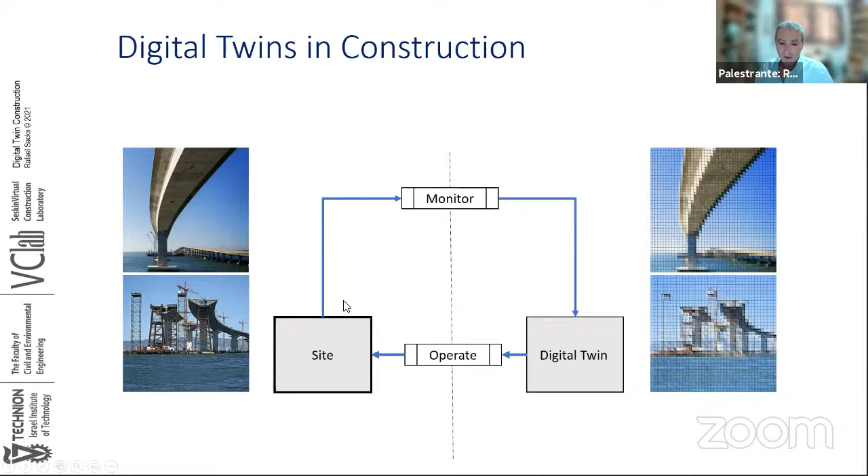This comes from the fundamental ideas of digital twin from manufacturing and transportation. You might imagine an airplane's jet engine flying through the skies, and in the control room of Rolls-Royce somewhere a digital twin of that engine, monitoring oil pressure, speed, rotation, temperatures, and a whole range of data. If they need to make corrections to how it's running, the digital twin can make those corrections using telemetry directly into the engine while it's flying. So that's the concept behind this.

When we talk about the kinds of monitoring we can use in construction, they include a range of things, from basic Internet of Things sensors like temperature, humidity, density, quantities, through laser scanning to build digital point clouds, photogrammetry using 360-degree cameras or other images, through barcodes read by barcode readers on site, radio frequency IDs or Bluetooth tags sensed by smartphones or other equipment. Many trucks and tower cranes and other equipment have a 'black box' that monitors the equipment as it's operating, and some companies already have the telemetry needed to get that information into the cloud and into the digital twin for the project.

We can also have people on the site using their smartphones to report things and confirm something is done or not done, or there's a problem, or take photographs. Many construction companies operate enterprise resource planning software, like SAP or others, so purchases of materials, payments of salaries, accounting, timesheets for workers, and all these kinds of things are available digitally. And not to forget, we also have audio recordings we can use.

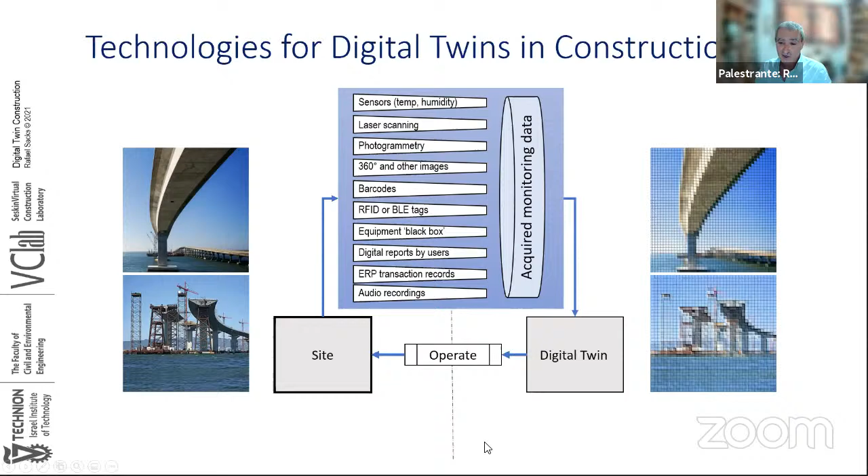Then we acquire all this monitoring data. Although I show this as a single arrow, we need to interpret it all to build up this digital twin, and that's not trivial - it's really complicated. The complication arises because the amount of data collected is very, very large, and we can't use that raw data.

So what we really want to achieve is this thing called a project status model. A project status model is a bit like a BIM here, but a building information model tells us what is the future of a building. A project status model tells us what's the present and the past of a building. So to go from this raw data through to the project status model, we have to do a lot of work interpreting and merging the information.

This is largely done with artificial intelligence, and that may be with rule-based systems or with image processing, computer vision, and other things. So we're trying to go here from data to information.

The reason we want to use the BIM as a supplement for information here is that it's often much easier to interpret something I can sense when I know what to expect. So if I have a point cloud with points that fall on a particular wall, it's helpful to know what the intent was in terms of having a wall in that place. Then when I find points on that wall, I can make logical conclusions about what those data points in the point cloud represent.

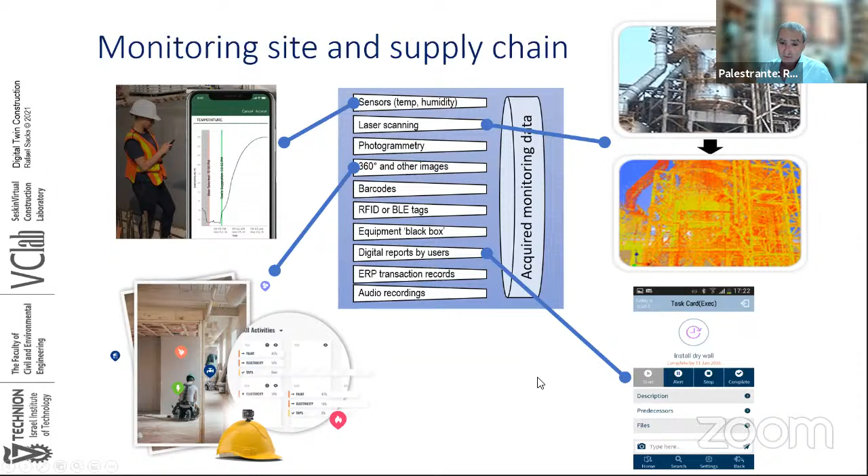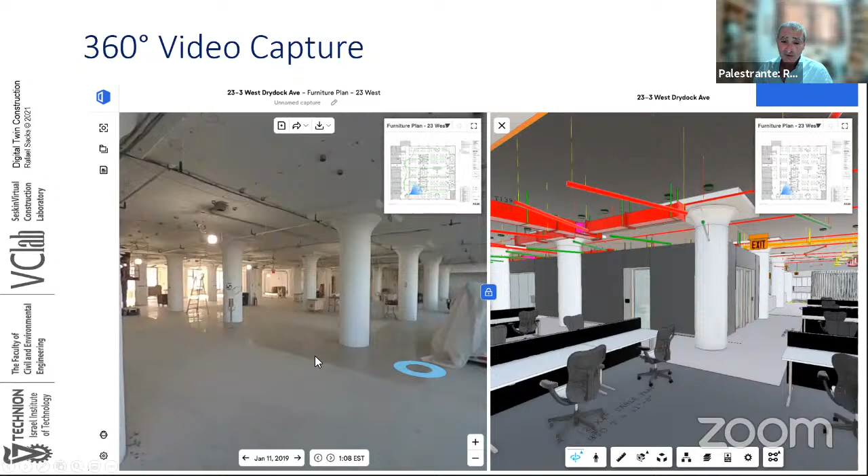On the left, you can scroll backwards and forwards in time because those videos are taken from a 360 camera every day, so you can go forwards and backwards through the site. You can also run comparisons.

Buildots is a company now active in many places in the world. They've raised, I think, a total of $46 million for development, and they're continuing to expand.

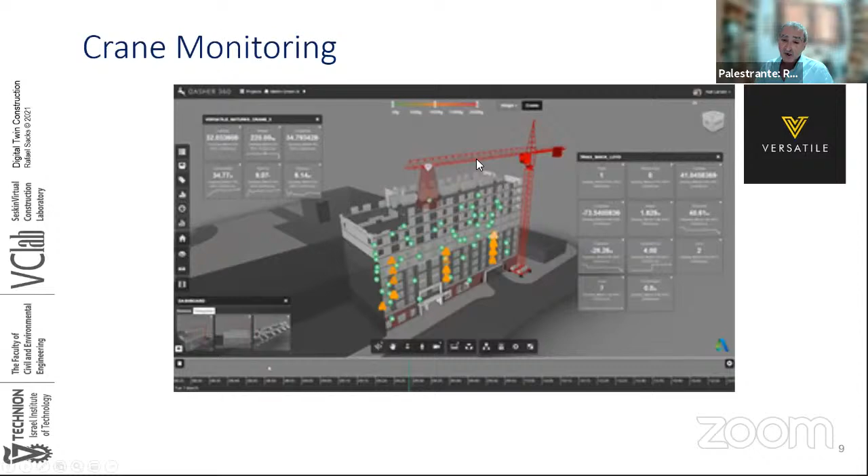There are other examples, companies who specialize in monitoring tower cranes. This image is from a company called Versatile. Versatile likewise began as a startup and is now active in many parts of the world monitoring tower cranes, but actually they're using it to monitor the state of the project.

And it also works in the other direction. Both of those technologies work from the field to the model, or to the digital. But here's an innovation that works from the digital to the field. What we're seeing here is a company called Lightyx.

They have a machine that can project the plans or models onto floor surfaces in the real world. So you take your BIM model, load it up on a machine, and project it directly onto the surfaces, whether it's on a floor, a wall, a ceiling, a roof, or wherever. So we also have technologies for going from the models to the field directly for production work.

Now, all of those are, I chose 3 Israeli startups which have their roots in the Technion, in graduates from the Technion.

But of course the big challenge is this, and I'm going to go back for a moment to here. Each of those applications you already see being developed fit into just one of these sources at the bottom. None of them do this interpret-and-merge step, where they take information from multiple sources and create real project status information.

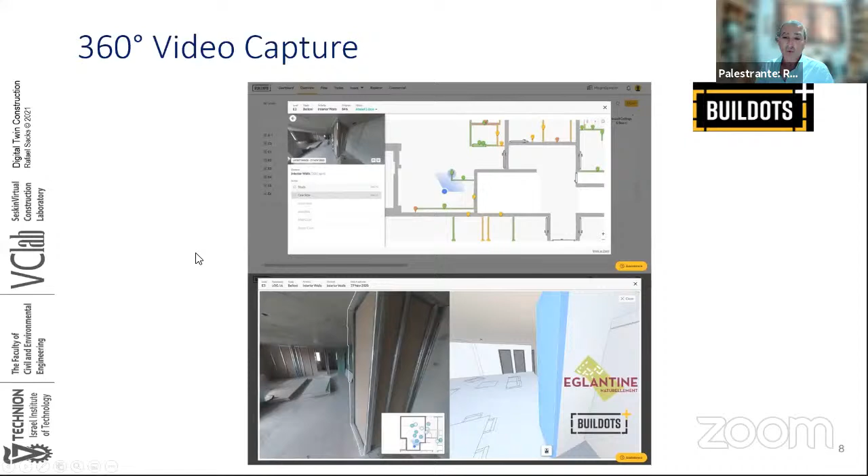To be able to say, okay, what should I do about it? What's the next step? Making intelligent control decisions about what to do, it's not enough to know data or information. You have to have knowledge, and that knowledge has to have the context where you merge all of that information.

And we have a separate research project dealing with that. It deals with complex event processing, and I'm not going to get into that now. But what I do want to do is say this.

When we think of the digital twin, what we really want to do, because we have a closed cycle of monitoring and operating, is use the real-time information streams to enable a closed-loop model of construction control. The best model we have for that is from lean construction, the idea of plan, do, check, and act.

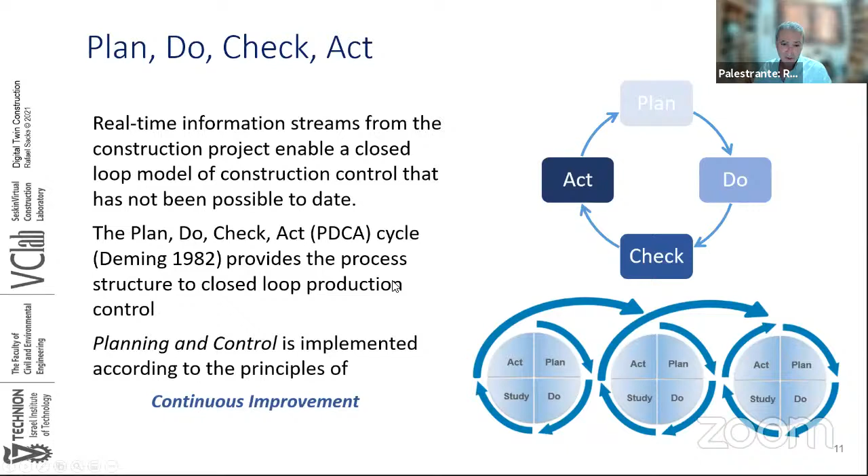And of course we do this consequently. So in every planning and operation cycle, we plan, we do something, we study it, we check it, and then we take some action to change the way we're working, and then we repeat that repeatedly until the project is finished.

So if I think of this cycle of plan, do, check, act in the context of the digital twin, the first thing we're doing is digital modeling of a built facility. So we build a BIM model, and the BIM model is not only the product, but also the process. We're talking about not just what we build, but how we intend to build it, when we intend to build it, and who will build it. And then we build: we fabricate things off-site, we construct things on-site, and we operate the building site.

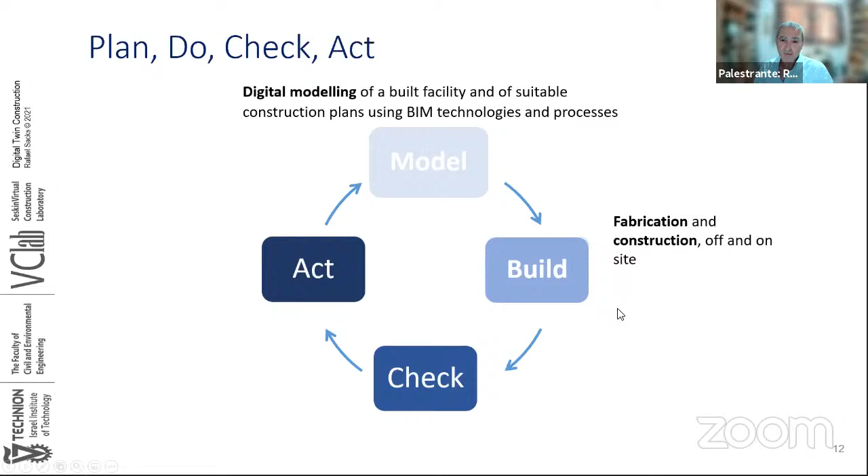And then, as I said, we monitor and interpret. This is the digital monitoring of the facility. We interpret that information using some intelligent software to generate what we call the process and product status. And then we want to evaluate and improve.

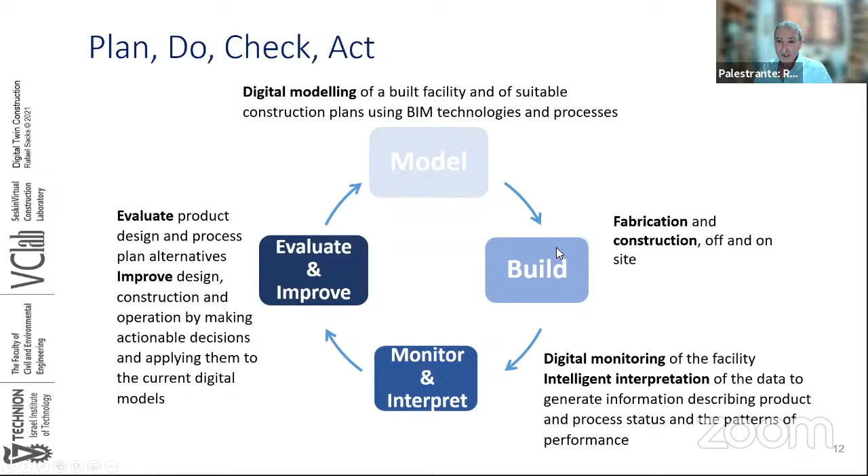That's the act part. We want to evaluate what we've done. We also want to evaluate alternatives for going forward. I have a construction plan up to now, I have a schedule, but if I continue that schedule, what will happen? And if I change the schedule, if I change the construction plan or the methods, what will be the outcomes? And if I can do all that, and I come up with some better plan, an improved product design, then I need to go back to my model, change it in the BIM model, change it in the construction plans, and then use those to build in my next week or month cycle.

So on the basis of that idea, we have a process map where we try to lay out the different components and aspects of what we call the digital twin design and construction process. You can think of it like this: it begins, of course, with the plan, do, check, act, and it's a series of these cycles.

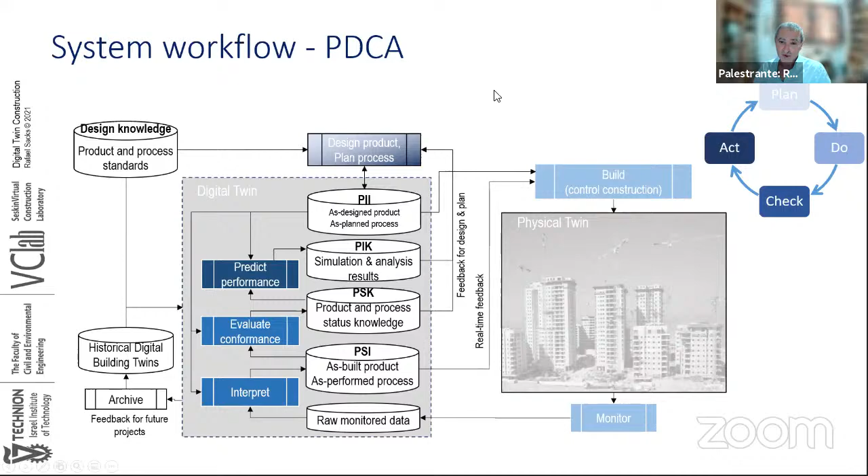So our process begins with designing. I design some product and plan a process. When I design the product, what I generate from that is our project intent information. We have here PII, the project intent information. This is what I intend to do. It incorporates the BIM model - this really is the BIM model. On the basis of the BIM model, which is the as-designed product and as-planned process, I then go and build.

I build the building, I operate the construction. That generates a physical twin - I'm generating real buildings. And then I monitor them, using all of those technologies I mentioned before. And they generate for me raw monitored data.

Now here, I want to call all this digital side the digital twin, but you can see right away that if this here is the BIM model, the PII, that's quite different from all the rest of this stuff. So what is the rest of it? It's raw monitored data, which I then interpret, and I have what I call my project status information, PSI. This is past - it includes the as-built product and the as-performed process. It's maintained in a separate database, separately from the BIM model and the plans, which are future-looking.

I then can evaluate conformance. Well, what does evaluate conformance mean? I can compare what I intended to do with what I actually did. And the difference between them gives me knowledge about the product and the process. Am I on time? Am I behind schedule? Is the construction accurate enough? Are there quality faults? Are there safety problems? All of these conclusions that I obtain by comparing the PII to the PSI, I can call my knowledge about the current state - we call that the project status knowledge.

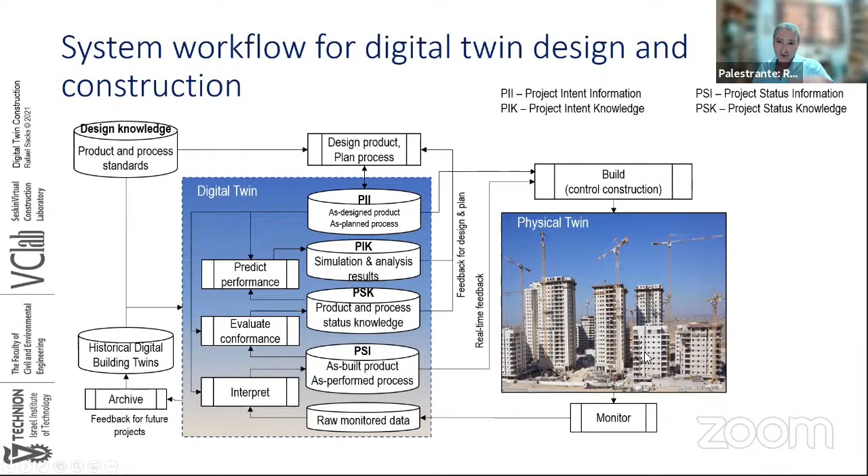If I focus for now on the predict performance part, then I'm comparing the project intent information and the project status and knowledge about what the situation is. I'm going to use those two things to try to predict what might happen in the future. And that will give me a basis of information for making decisions about what to change, if anything.

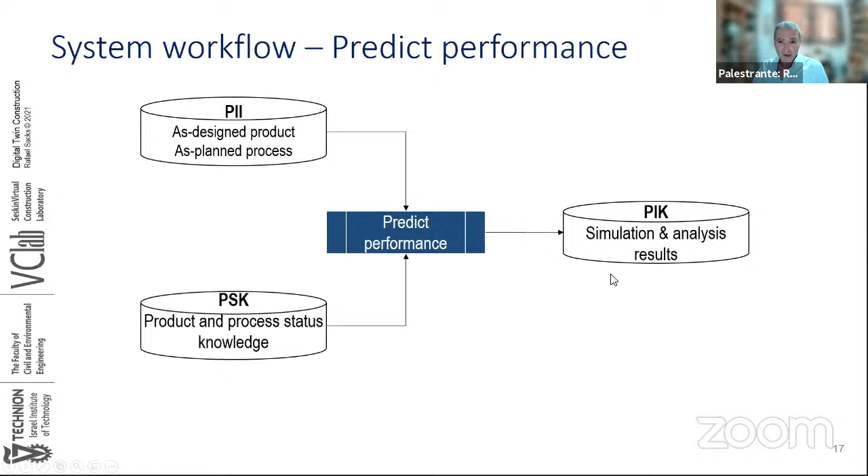What we do is we begin and say, first we need to know some things from the user, from the construction managers. These things are constraints, future constraints. When will equipment be available? When will it not be available? When will resources be available, like workers, like materials? What are the weather forecasts? A range of things we might know about the environment, about the constraints that operate on our project.

On the basis of those constraints, we can generate what we call alternate plans. So I have a baseline plan, my current construction plan, and now I want to generate alternatives. Those alternatives are dependent on my constraints. So I might say I'm using now 4 crews of floor tiling workers, but actually if I need, I can have 5 crews or maybe 6 crews. So my freedom of action is to reduce crews or to add up to 2 new crews.

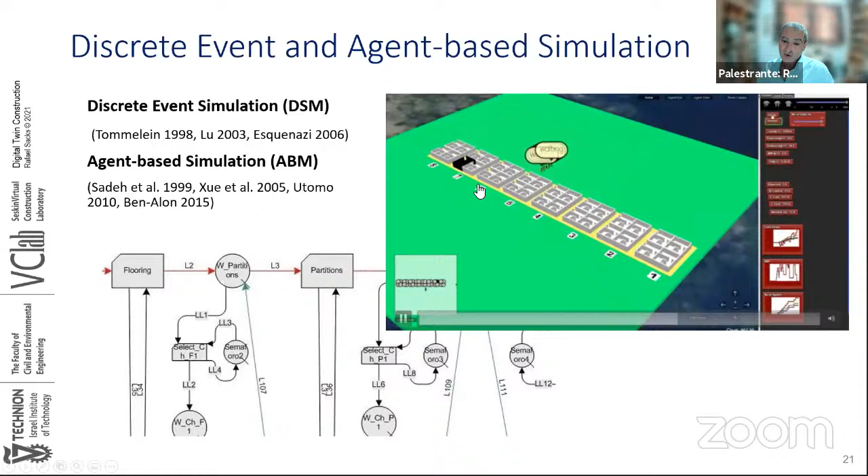Now you might ask, what do I mean by the simulations? I'll give you a quick idea. This is previous research we have done. Some of you might be familiar with the LeapCon simulation, a live simulation game. This is a computer simulation of the same game, but the idea is you have 4 contractors, and in the computer you simulate how they go through 8 floors of a building, building apartments, and as they go, they do different pieces of work.

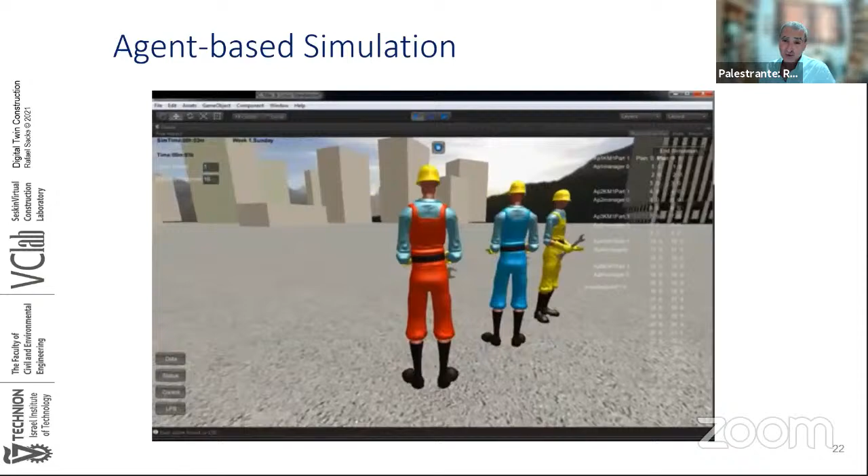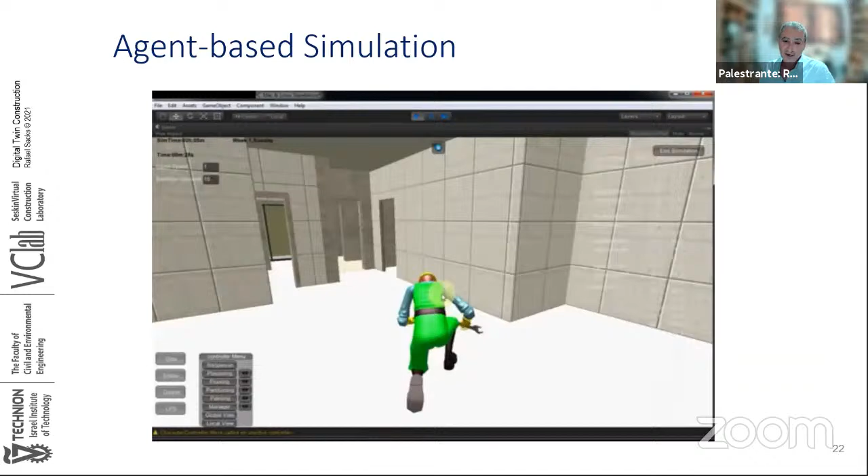This is another simulation that uses a BIM model and an agent-based simulation, where we see 4 different crews doing flooring, painting, plastering and drywall construction, and the computer can simulate their movement through the building. This is what we call emergent - we don't program where they go, we program their behavior and decision making. They get information from the physical reality of the site and make independent decisions according to the conditions a subcontractor might meet on a real construction site, and they go and do the work. The eventual duration and cost of the project is what we call emergent.

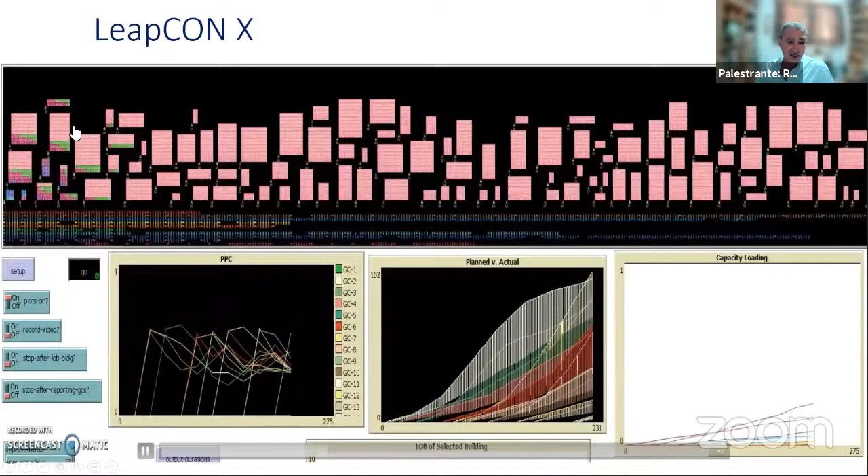I'll show you just one last one to strengthen the idea. What we're seeing here is a simulation not of one single building, but of an entire construction metropolitan area - this is a model of Hoboken, New Jersey. Each of these rectangles represents a building under construction, and this represents 4 years of construction. Each building has a certain height and a certain number of apartments on each floor. You see the colors running as each contractor goes through the building, and down here you slowly see the development of the S curves for each project. So you can simulate these things not only on a single building.

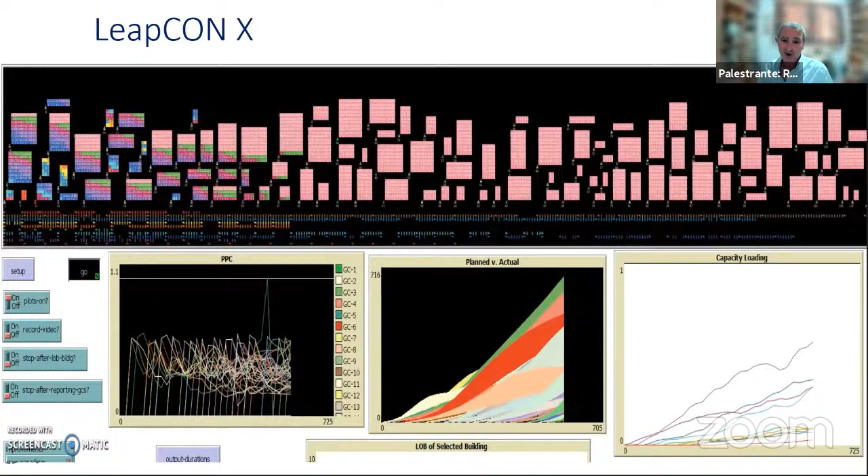The reason we're interested in multiple buildings like this in a simulation is that in any environment, projects compete for resources. Your subcontractor might be working on more than one project at a time, and that means each project impacts on every other project that's running in parallel.

All right, so our tools for simulation are fairly sophisticated. But of course, now to do it on a digital twin, we need to do it in a far more detailed way.

The next step will be to get the results and come to the users and say, here's what we recommend. So here are some examples of the kinds of recommendations the system might be able to make: increase or reduce the number of workers, machinery and equipment based on the deadline and the budget, reduce the cycle time of some construction activities, and so on. The possible outcomes can be represented in all of these things.

As I said before, it's not only the overall cost and overall schedule, but things like what is the resource utilization rate of a contractor or a tower crane, what is the productivity, how much non-value-added time or waste is there in the project, and what are the cycle times for different products, and so on.

So this is the kind of dashboard we are now designing, with the idea of thinking: imagine we have digital twin construction, imagine we're able to do the monitoring, get the status information, do the simulation and get the results. What kind of interface can we then expect to present to construction managers on site to give them an idea of what to do?

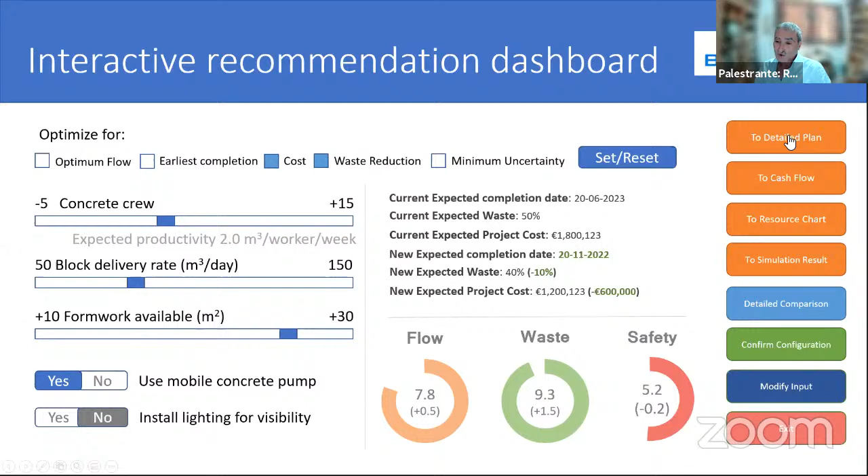So it's giving you a forecast from today to the end of the project, what the outcomes might be. And if you'd like, on the basis of those selections, to know more information, you can go to some of these buttons on the right-hand side and get more details. For example, you might ask, if I make these decisions, how different will it be from the previous situation? My current baseline plan might be here, and my new plan might be here.

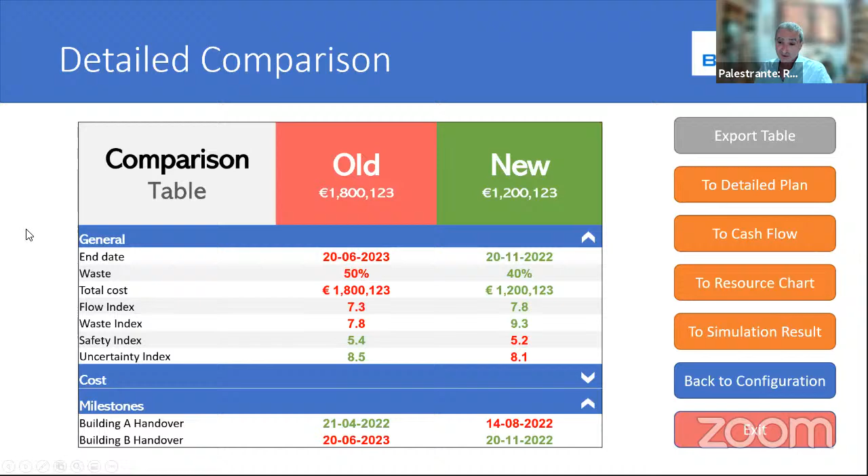Now, I don't want to create undue expectations. This is all at this point in our first year of BIM to Twin. These are all system designs. None of the software yet exists. But this is the kind of thing we imagine for the future, that we're now designing, and we will be building prototypes.

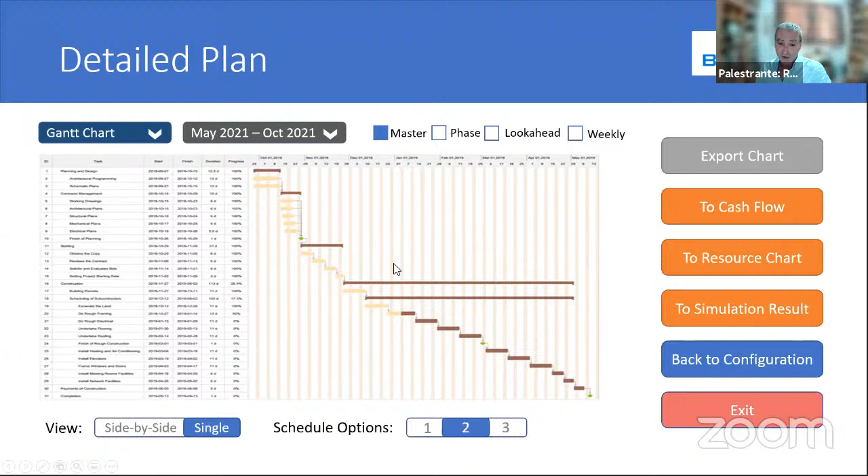For example, you might say, if I choose these choices of equipment, of workers, and so on, what will be the master plan? How will it look? We have a current date here, and everything down here is the future. And we might say, if we're doing a detailed plan for a week, where are the different laborers going to be, where are the different crews going to be on the different floors of the building through the coming week?

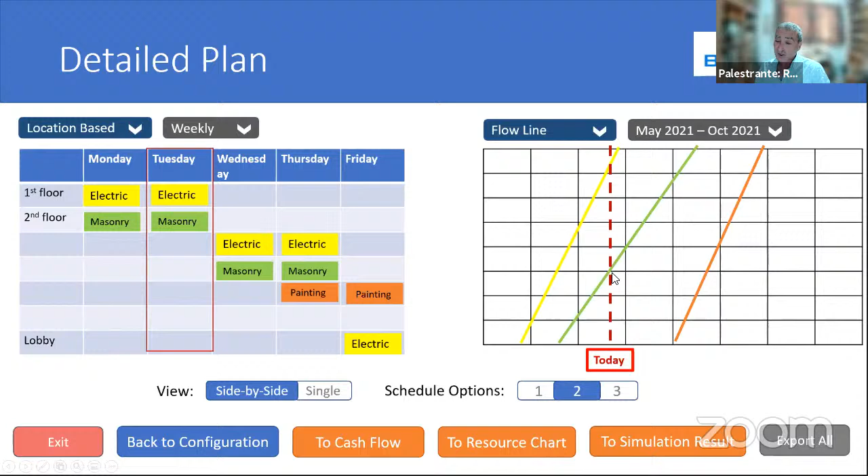And how do we expect the flow of their work to look like? Will there be intersections between crews? Will there be conflicts and so on? And we might also say, what cash flow can we expect? And even, tell me the histogram of the number of workers I can expect to have on site during this coming period.

So you can imagine that eventually you might have a project control room that looks something like this. You have a little boardroom, and around the walls you have all of these dashboards of the BIM model, the current schedule, some details, and the recommendation dashboard from the digital twin. And you say, I'd like to change this and change that, and it tells you, if you change that, the design will change like this, and the schedule like that, and the outcome will be something. You make your decisions at every planning meeting, perhaps every week, perhaps every 2 weeks.

Now, of course, you can make the leap of faith and say this control room does not have to be at the construction site. That control room can be somewhere else. Why not put it in the headquarters building of the construction company? That way we have fewer people on site, and they can run it from here.

And then you can make another leap of faith and say, actually the control room is the same for any project, it's only the information that changes. So why don't we have a team here that manages more than one project? Maybe they manage 10 or 20 projects. Maybe each day they focus on one project, or 4 projects per day, and they can do a site meeting once a week for every project.

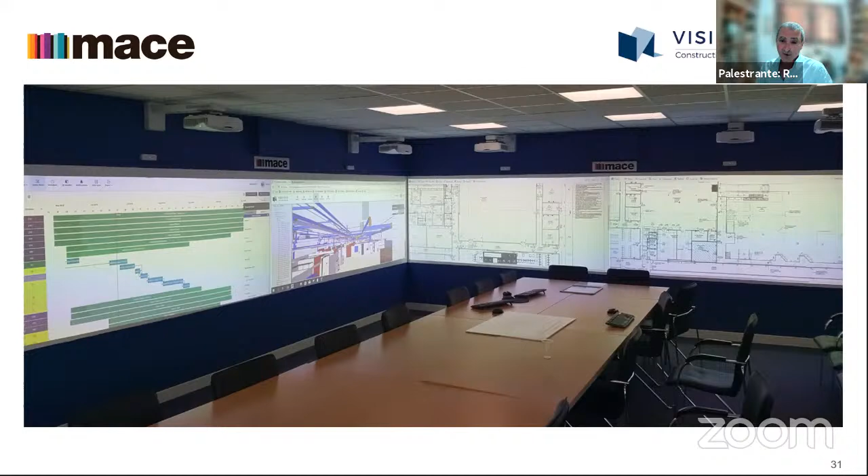Now, I should mention that this control room is not a mock-up. This is a real project control room from a project of Mace, a big UK construction management company. This is from a computer server center they built in Ireland, I think 2 or 3 years ago, and they use both BIM and VisiLean and other software to do this. So these kinds of construction production control rooms are starting to become real. These are on site, and there's no reason to think they would not be somewhere else.

And now you can make another leap of faith and say, who will provide all of this computing power? Who will provide the technology for monitoring?

Who will provide all the AI systems? Well, it may be that there will be software or startup companies that offer this as a service. And then a general contractor might be able to subcontract production control to a central platform company that's running the same software for everyone.

That production control company could be a platform, a bit like Uber or Deliveroo or one of these major platform companies. And so the potential exists for digital twins for construction to morph into something we call digital twin construction, where some of the current functions of construction management that are currently run by contracting companies may move to professional platform, computer-based AI construction management, digital construction companies. That's a radical and major change that we may see in the future, but the more we automate the information, the more likely this becomes.

So I'm going to stop there and open up for questions.

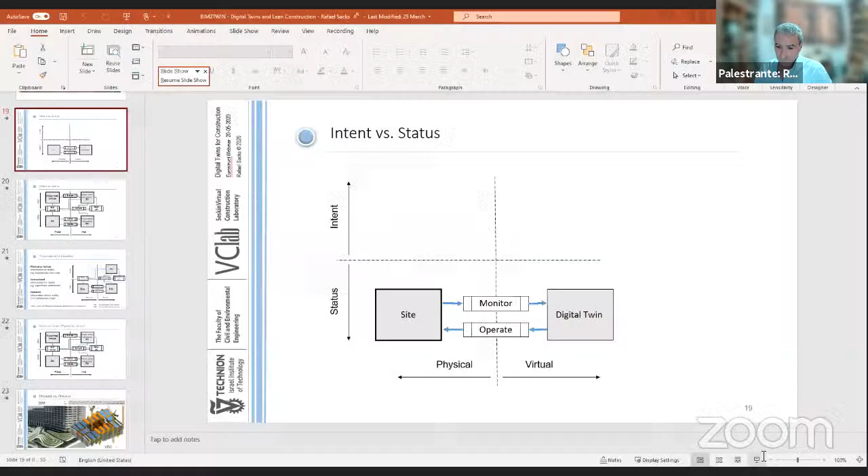What I want to say is this. You can think of it this way. Let me try here. I'd like to share again, and I'll try to make this brief. Is that okay? Can you see that? Give me a moment, I'll share that once again just to be sure it's the correct one.

If you imagine that we have the site and the digital twin, then we have two dimensions of information: physical information and virtual information. So we have the physical site and the virtual digital twin. That's the first axis. The second axis we can define is the difference between what there is and what we intend to do in the future—this axis between status and intent, past and future.

And in the four quadrants that we now have, we can put here what we call our project intent information, PII. Using the PII, we create a physical status—this is the physical building. And from that physical building, we can monitor and get project status information. This difference between project intent and project status is future intent and past reality.

This part is the BIM model, because the BIM model represents what we intend to do—it's our design. But now there is another axis. If we think, for example, of doing a physical prototype, like a mock-up of a room or a physical mock-up of a window, that fits here. That's a physical expression of what we intend to do in the real building, but it's only a mock-up.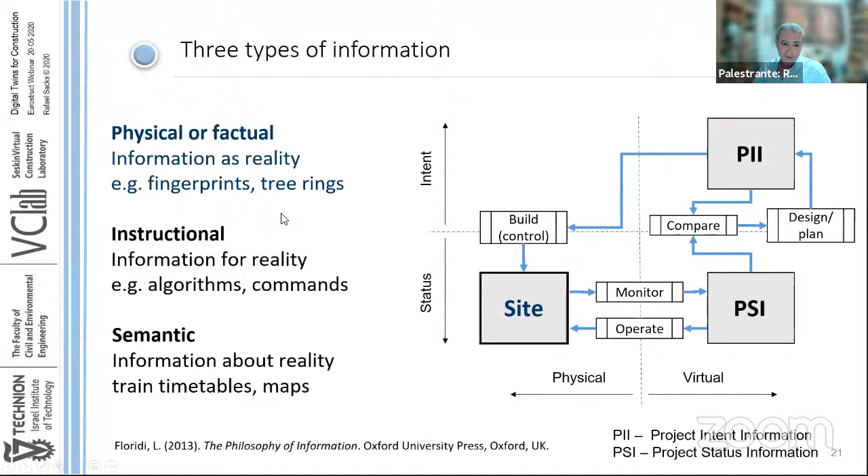But now we have another axis that I want to show you, and I'll just skip here for a moment. The other axis we have is between product and process.

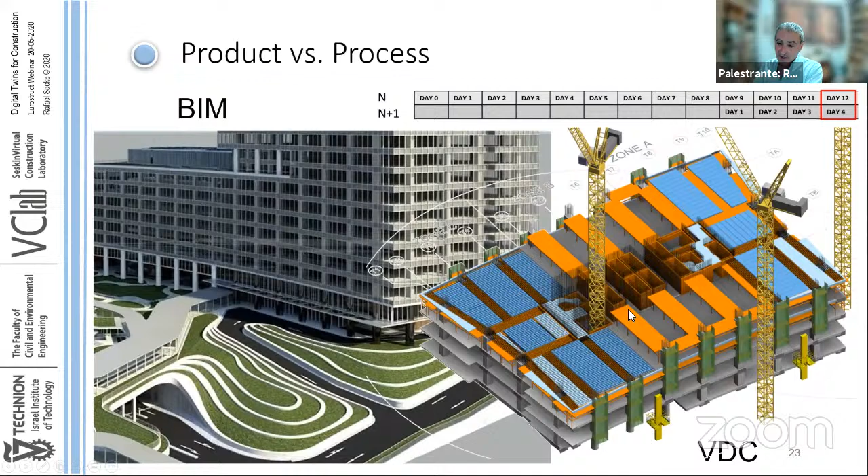So we have information about the building we're going to build, and we have information about how we're going to build it - our schedule, our production plan, our production system, and so on. Now, if we think of those three axes, then we have the physical and the virtual, we have the status and the intent, and we have the process and the product. And now we have 8 quadrants.

Two of the quadrants here at the back, the physical intent, generally we don't have, so we only have these four. These ones, the building and construction, the construction process, that we understand very well. Those are physical things. The PSI as-built and the PSI as-performed is all the information about what was done. It's usually in the form of point clouds or measurements and so on. It's not necessary - it can be building objects, but it's not what we generally think of as the BIM model.

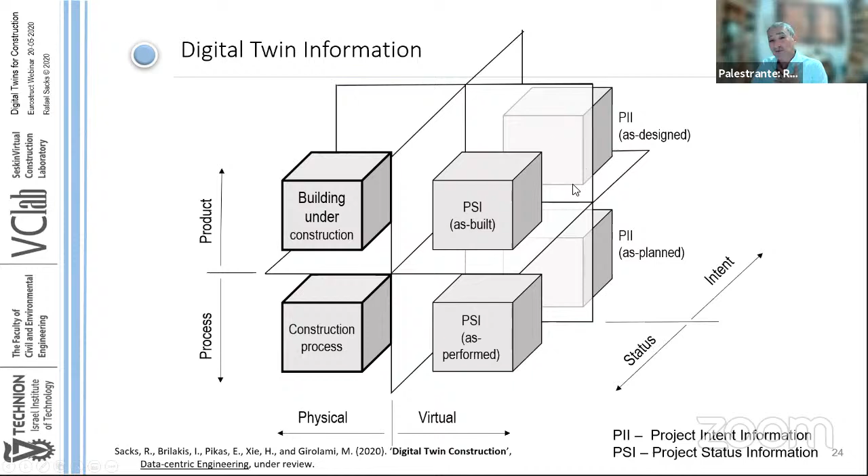So these two parts here, the PII as-designed and as-planned, this is what we think of as the BIM, at least what I think of as the BIM model. And you can think of it in this way: if we talk about digital twins as kind of people - that's our metaphor for people - then people have a lifetime, and twins are conceived and they're born and they grow up and they grow old. And so we can think of it that way.

Here is a building project with BIM. We have a start of conceptual design. We design something in this period of time, going from left to right. Then we can start some prefabrication off-site, so we have off-site prefabrication - we start making things. This blue part is the physical part.

And then on the start of construction on the site, we begin building. We install construction plant - that might be a crane and a fence and the formwork and scaffolding and so on. And we also build the building itself. And as time goes by, we add more and more physical pieces. In the end, we have a project that we hand over.

Now, at the same time, we're doing design and we're creating a virtual representation of that building. From day one, at the start of design, we start accumulating the BIM models, the products and the processes, the construction plans and the BIM model with all its complexity.

But now, once construction begins, off-site and on-site, we begin monitoring what's happening. So we begin taking movies, doing laser scanning, collecting Bluetooth information, RFIDs, barcodes, everything. And that gets compiled in this database - it's the as-built product and the as-performed process.

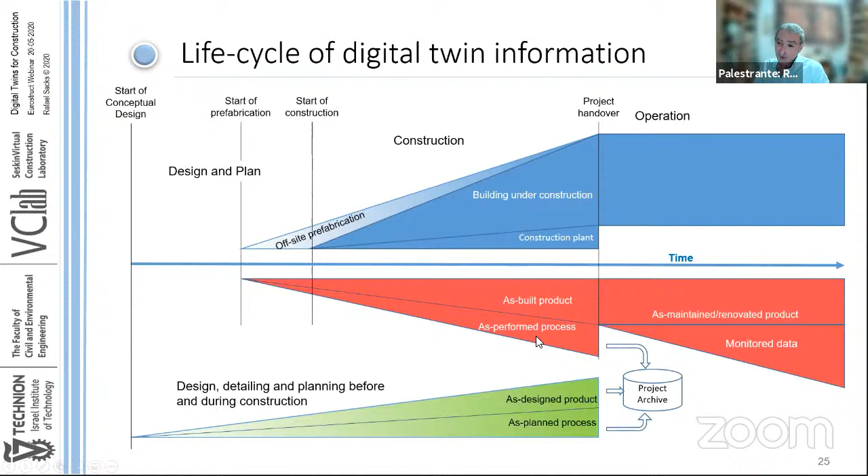Now, when the building is finished, we move it into operation, and the as-built information, we move into what we call here the digital twin for operations and maintenance. Now, that's different from the construction digital twin - over here there's a transformation of information. And the information about the process, who the contractors were, when they came, how long it took, what was the productivity, plus all the BIM models, they all go into a project archive, which is what we might call our historical digital twin. And we can use that to get useful information for future projects.

So what I want to say here is that this is the BIM information, this is the project status information. Although they are very closely related, they're not necessarily the same thing conceptually.

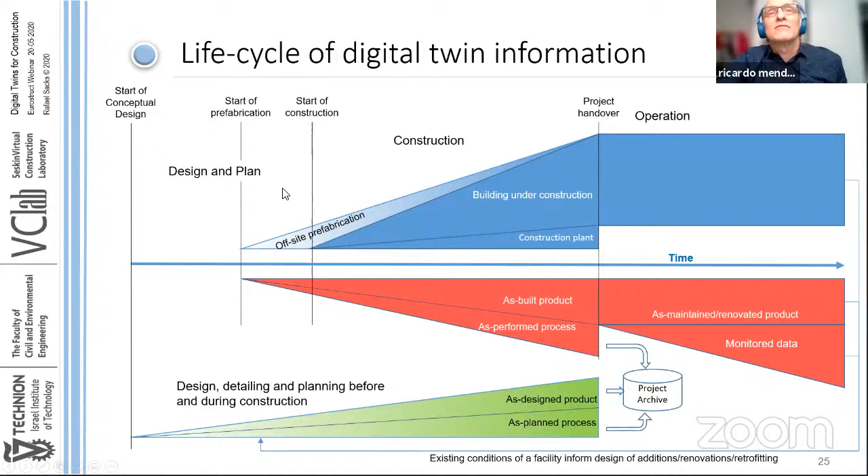It's the 1 million dollar question: how to change the mindset of the traditional engineers to use new technologies? If I answer this correctly, do I get $1 million? Probably, probably. You know, even if you say yes, I'm afraid I don't have the answers. It wouldn't help me. Oh, you don't get money.

Often people ask this question: how do we change people's mindset? How do we encourage people to adopt BIM, to adopt virtual design and construction, to use monitoring technologies, to use modular construction, offsite, a whole range of questions. And I think that fundamentally, people behave in their interest. Now, I say that very carefully - I don't want to say in their economic interest, because there is a great body of research in behavioral economics which tells us that behaviors are not necessarily what we perceive as being, in traditional economics, rational.

They're often guided or motivated by influences that don't have to do with earning money or having the best outcome or result. They have to do with status, motivation, how people perceive themselves, how they respect themselves, how they think others see them, as much as they have to do with economic success.